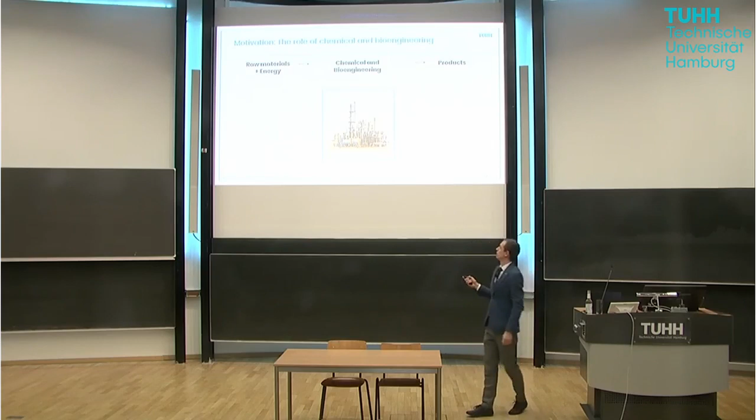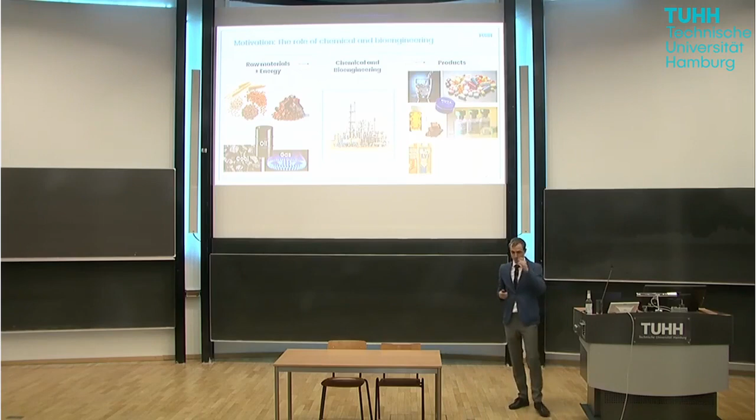Chemical and bioprocess engineering, or bioengineering, does basically one thing, or many things, but you can boil it down to converting raw materials and energy into useful products of our life. Raw materials are agricultural crops, ores, energy carriers, and the products are liquids, beverages, drinks, or pharmaceuticals. The COVID vaccine is a great example of bioengineering that saved a lot of lives on Earth. And also other products like garments, fuels, paints.

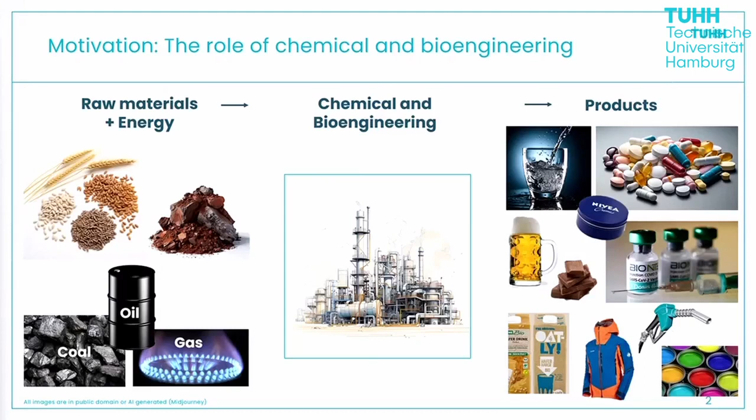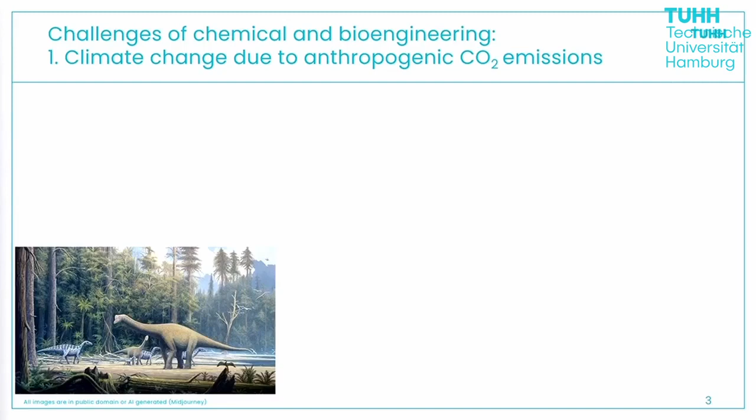Our modern life really relies on chemical and bioprocess engineering. But we do face a couple of challenges, and I want to specifically mention two of those. We heavily rely in chemical engineering on fossil raw materials and energy carriers to produce the things that we do. And what are these fossil carriers? Well, that's nothing else, with a grain of salt, than dinosaurs and what they ate many million years ago. And we're digging that out and we're burning it. What we do is release the hydrocarbons, the carbon in these hydrocarbon bonds, into our atmosphere, and I think I don't have to explain what that does to our climate.

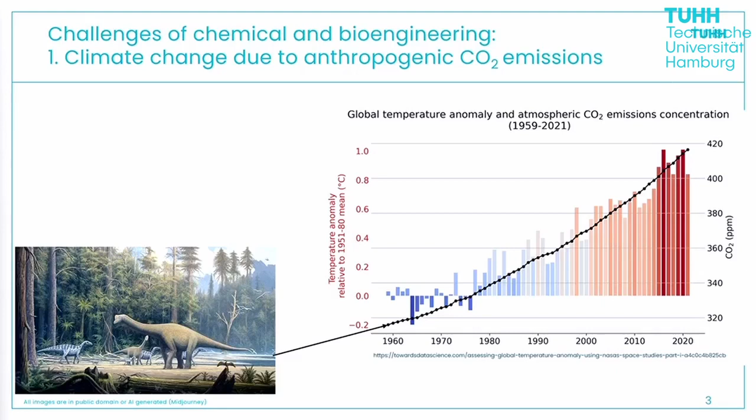This was predicted 100 years ago by Arrhenius, a chemical engineer, and it turned out to be very true. There is a strong correlation between atmospheric CO2 and global temperatures, and they tend to rise, and this is a huge problem that we will all face during our lifetime. So we need to get ourselves independent from these fossil material and energy carriers.

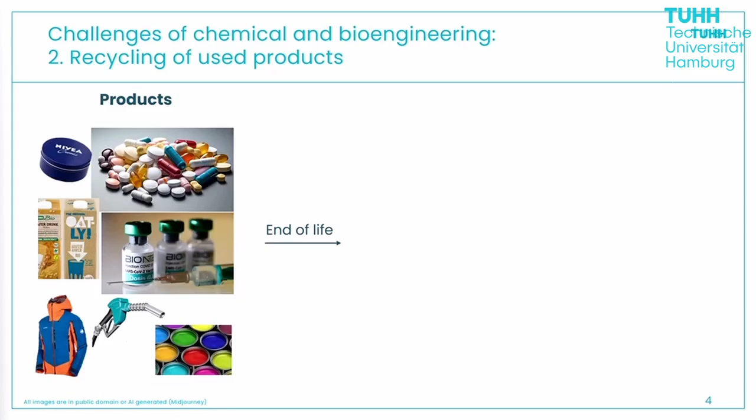A second problem is the products, on the other side. At the end of their life, what happens with these? In Western Europe and in many parts of the world, we do have a strong history of waste incineration, so we just burn our waste, and that releases CO2 again. But there's a lot of valuable materials in this that we could reuse. Even worse, in other parts of the world, landfills are very common, and plastic products pollute our oceans. Microplastics have been shown to be in human bodies. So these are two major challenges that chemical and bioprocess engineering face at the moment.

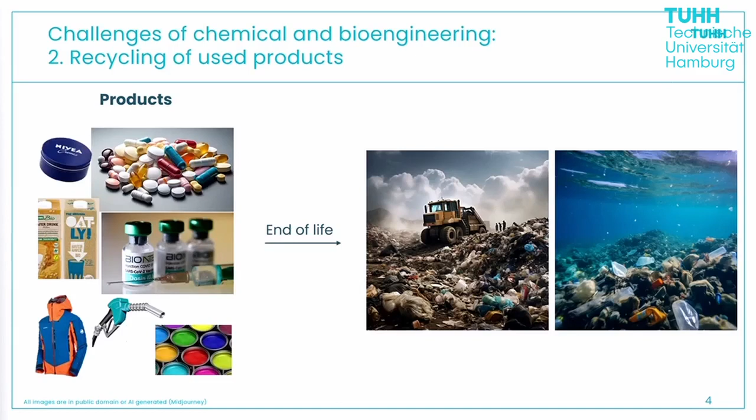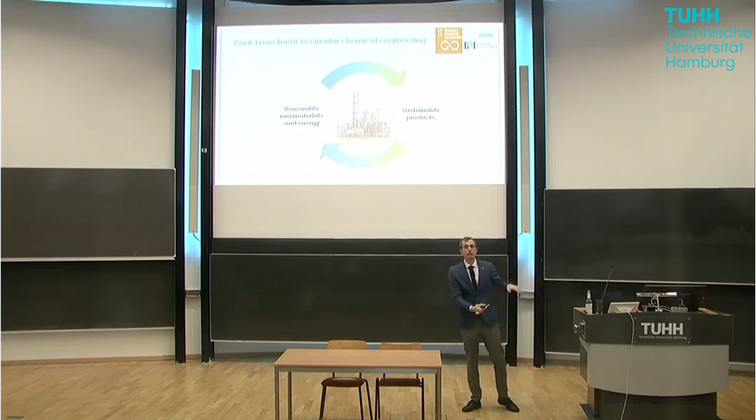One goal would be to close this loop, going from linear production, taking something and transforming it into something useful, to closing the loop and going from renewable raw materials and energy into sustainable products that can later be reused as material streams, as inputs for processes. For example, biomass or CO2 that we capture from the atmosphere as carbon in our materials. We need it a lot in our products, so we need to get it from somewhere, and we can get it from the atmosphere. Energy, there's a lot of energy coming from the sun and secondarily from the wind, we just need to harvest it. This is, partly, political decisions, but also technical, and we're working here on the technical solutions.

Also, have sustainable products, replace fuels as much as possible. Probably in aviation this won't be possible unless we have synthetic fuels, but also plastics that dissolve after a certain time, so it's not that severe if they end up in the environment.

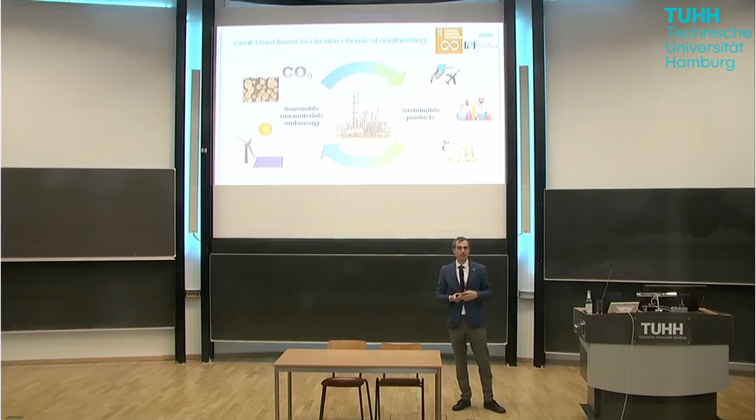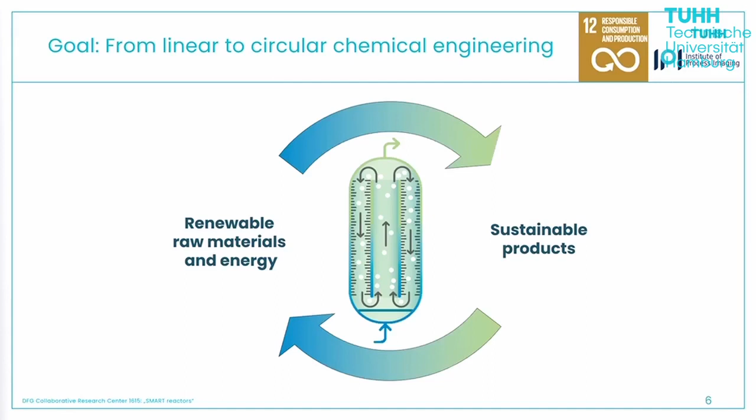What's at the core of this development? In such a chemical plant, the core and the heart of these plants are reactors. We heard the term smart reactors a lot, and this is indeed a picture taken out of the grant proposal that we were granted. The core of it is optimizing these reactors, making them fit to adapt to varying qualities of raw materials, ready to produce different materials, and do that fast.

What we need for that is a detailed understanding and knowledge about the processes happening inside these reactors. What can possibly happen in there? We have different raw materials, they mix, and we need to get them in contact. Where are which materials, where are the phases, for example liquid phase, solid phase, gas phase? Measuring where they are in space and time is important.

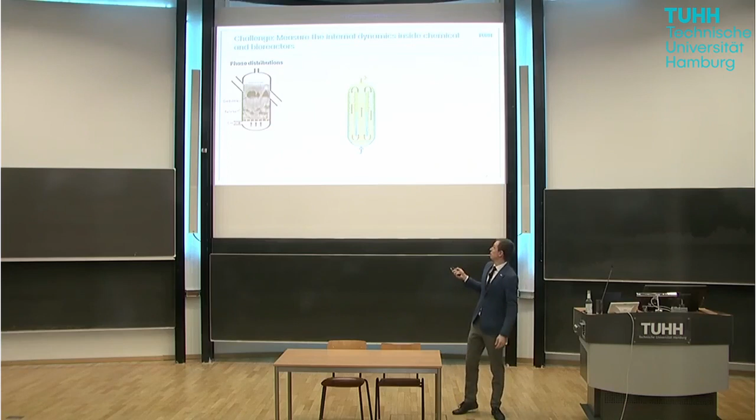Measuring the flow of materials is really important when it comes to mixing and residence times. Temperatures are also super important because chemical reactions, which we look at mainly, depend a lot on temperature. If something's hot, it might react faster, and if it's colder, it's slower.

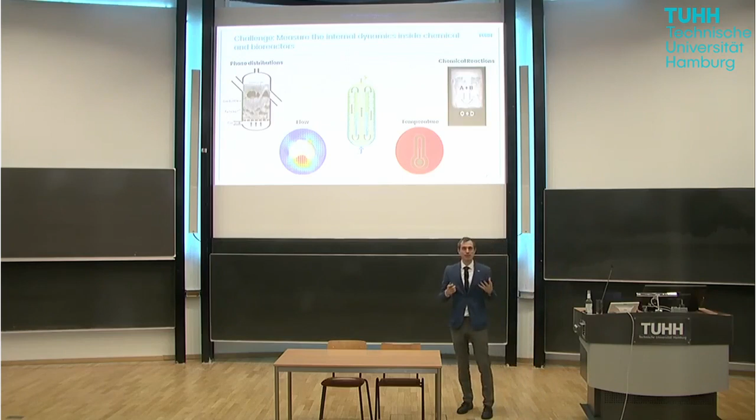And ultimately, this is kind of the holy grail in process imaging: we want to see where chemical reactions really happen, differentiate between chemical species, and really map in space and time where such a chemical reaction occurs.

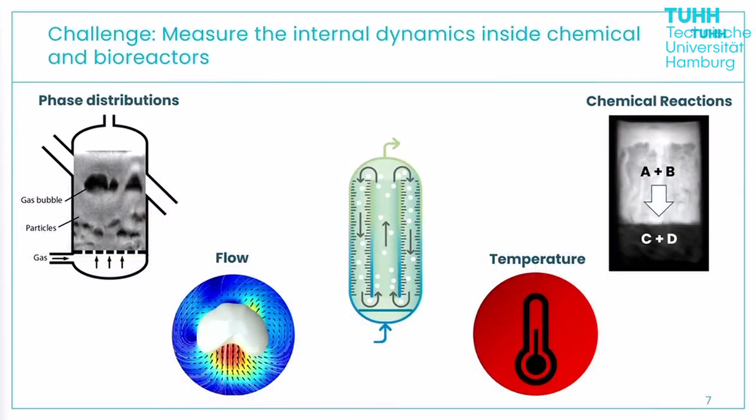For example, why this is important in a bubbling fluidized bed, a reactor type used for coating materials, absorption of CO2, and combustion of fuels. Here gases bubble through a granular material, so grains, and it looks like a boiling liquid as gas bubbles erupt and behave in quite interesting ways.

The gas bubbles are very important to promote heat and mass transfer and mixing. Efficient reactor design and control really relies on understanding these gas bubble dynamics, so we need 3D imaging with high spatial and temporal resolution.

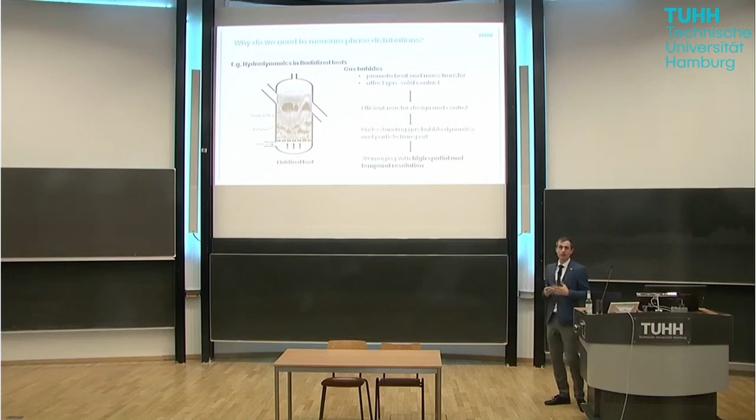A second example I want to give is temperature. Why do we need temperature? For example, in heterogeneous catalysis, like our colleague Raimund is investigating, we have a gas phase that passes through a packing of catalyst particles, and these catalyze a gas phase reaction.

When these are in contact, and this reaction is exothermic, we might end up having hot spots where we locally exceed temperatures that are unhealthy for the catalyst, so it gets degraded or deteriorated. Or we can have cold spots, regions where we don't have enough flow, and then the reaction dies off, creating ineffective zones that decrease the efficiency of the overall process.

So thermal monitoring is very important in optimizing such reactors, both in space and in time. Not just sticking a probe into a reactor and saying the temperature at this one location is X, but really seeing the temperature map, the three-dimensional distribution. That's a different quality of information.

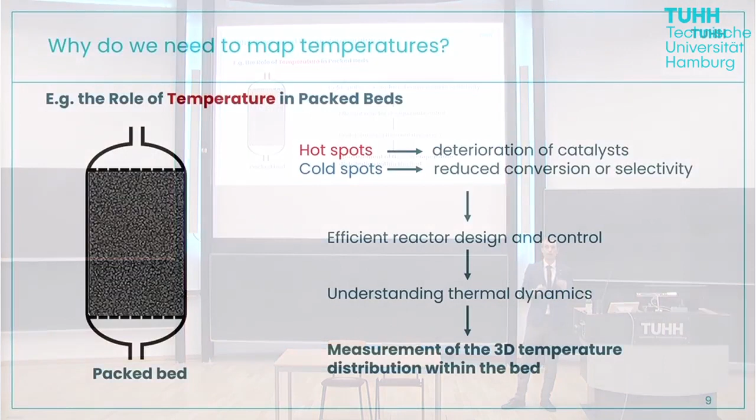And also, if you compare it to numerical modeling, which plays an important role in the future of chemical engineering, then these reliable and highly spatially and temporally resolved information are essential. So where do we get this information from?

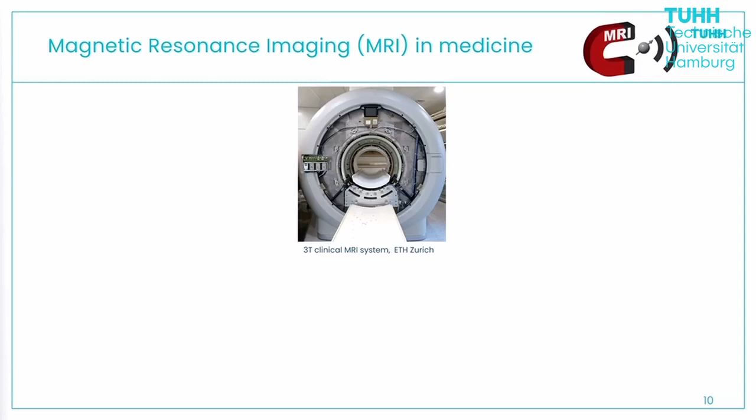Well, there's a technique you might be familiar with from your own medical experience. When you had a broken ligament in your knee or ankle, you might have been inside an MRI scanner. It's very loud, but it gives fantastic information about the interior of your body without cutting you open. This is valuable because cutting open my skull, I would not have agreed to. But in this case, it was just half an hour in a loud environment, and then you can beautifully see how such a brain is made up.

This is work by a former colleague in Zurich, where you can measure the instantaneous flow of blood inside a living human subject, in this case an aortic bow. You can really see if something's dilated, or if you have turbulence that makes the performance of a heart weaker. So for diagnostic reasons, this will become useful in the future.

This is also a technique called temperature sensing with MRI, where a dog with a tumor was treated thermally, with a laser. The tumor was ablated, and with MRI thermometry, it was controlled to ensure the temperature doesn't rise too much, because you don't want healthy tissue to die off. You really want to concentrate it on the tumor spot, and this technique was used for that.

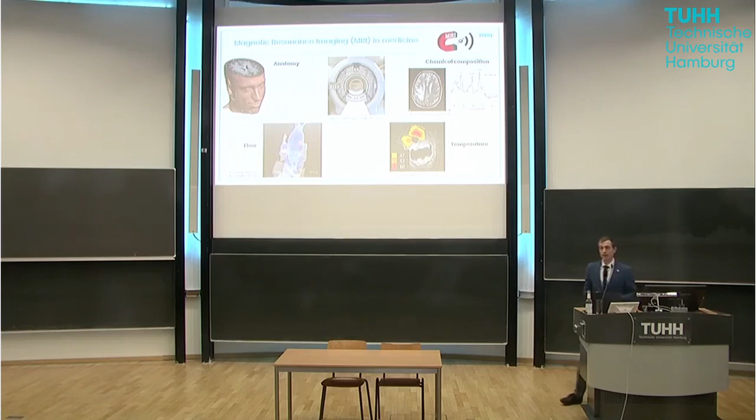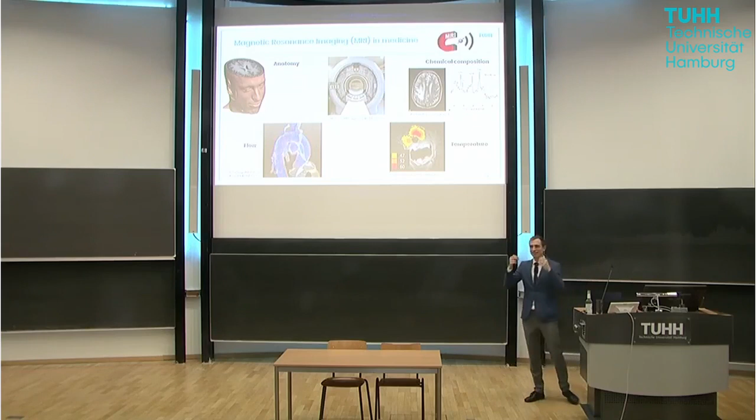So we see that a lot of what we wanted from our reactors is already there. And it's no wonder, the body is nothing else than a very complex biochemical reactor. We eat and we drink, we also extract waste products, but we do have... we think, and all of these things, they're massively complex, but in the end it's very similar to a biochemical fermenter, for example for the production of the COVID-19 vaccine.

So the big challenge now is, how do we take the clinical MRI technology, which is really advanced, as we have seen, so really big amounts of money have gone into this development during the past decades because it's such a useful tool, and how we can translate them into process engineering and make them useful for what we want, really understanding reactors.

Clinical MRI technology is really optimized for the human body. And that means the hardware is optimized for patients that lie horizontally when they're being scanned, so they don't move. That's important, that they don't move. And the materials, so the materials of human tissue, these scanners are optimized to, and the pulse sequences as well.

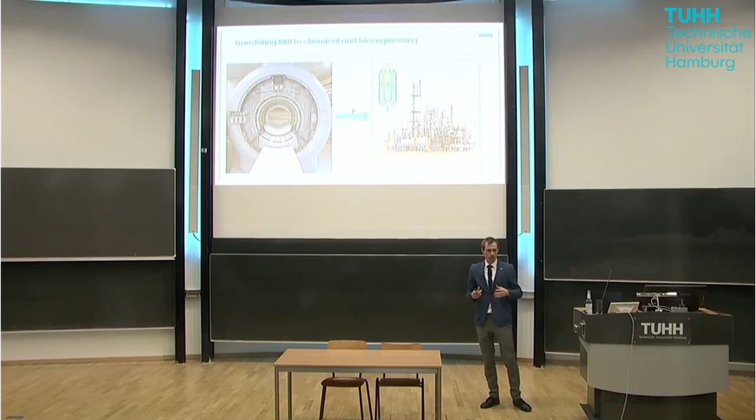And so when I started my PhD in 2013 with Klaus Prüßmann and Christoph Müller, we set out to really modify all of what the MRI experiment is, and try to optimize it for this type of systems that chemical engineering has. And that entails dedicated MRI hardware.

So really going close to the geometry of reactors, in this case a vertical geometry where you really have a proximity of your coils, because the signal decays quadratically with distance. So you want to be close, and you want to have multiple channels to be fast in scanning. So materials, manufacturing.

Oftentimes it's even easier in chemical engineering than it is in the human body, because in chemical engineering, in a reactor with gas and liquid, you don't care if you add a little bit of poisonous contrast agents, whereas in the human body you're quite limited on how much contrast agent you can inject. So this is even a part that gives us more freedom.

But yeah, in this case, for granular materials, for these fluidized beds that I showed you, and I will show you in a second some more, it was important to synthesize particles that have strong MRI signals, so liquids encapsulated in polymer shells.

Pulse sequences, so this is also a major thing where you have a lot of potential to increase spatial and temporal resolution, is by sampling your data space in an efficient way. And for that, you need to do your homework here and have enough signal, because during the time you read out your signal, it decays.

If it doesn't deliver enough signal, or your coils are not there, then you won't be able to do these single shot excitation, time-efficient readouts. And yeah, of course you need to reconstruct this data into images, and to automate and process these and do image analysis and interpret this data.

So as I told you, this reactor, for example, was modeled and then built. Previously, people used agricultural seeds like poppy and mustard seeds, but we came up with different materials that give quite a bit more signal, and we're further developing them and making them consist of contrast agents.

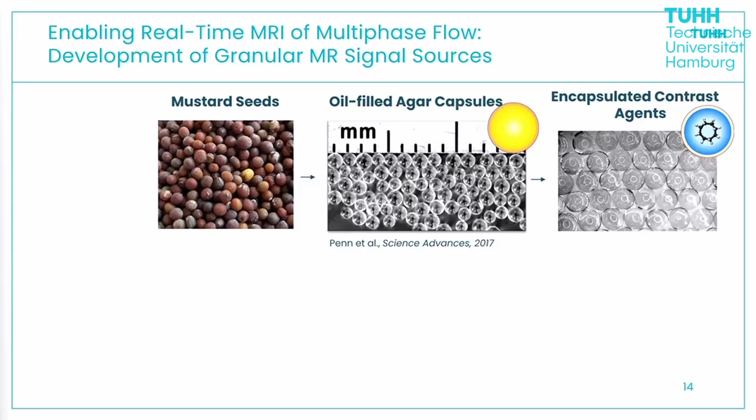As I said, these are a little bit not so... it's rare earth dopants that increase the magnetic susceptibility, which improve homogeneity of the field and then give you even more performance.

And yeah, if you compare them mechanically, this is much better. They're more spherical, so you compare them better to, for example, CFD simulations. They have higher proton density, so there's more oil in those than there is in those.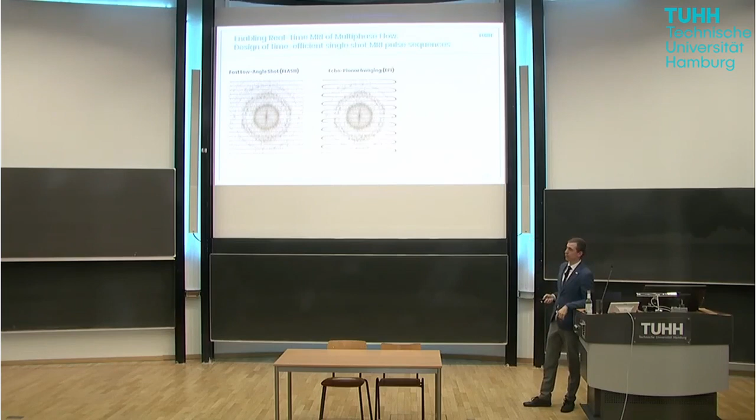And the signal lifetime, most importantly, as I told you, the signal lifetime really determines what type of sequences you can run, and this is important. For example, fast low-angle shot or gradient echo sequences, where you excite each line, they need more time. And if you can run through K-space, that's the data space in MRI, at once, then you're faster. Or spirals are even better.

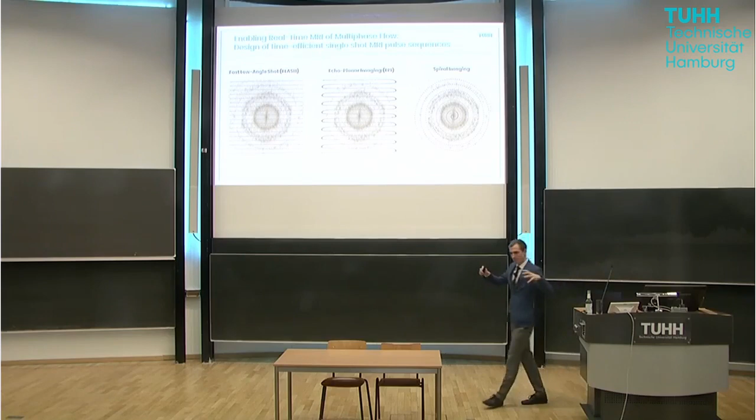For that, you need even more precise field control. So, in essence, we looked at the toolbox of the MRI chain and tried to modify and optimize each bit and stitch it together. And then, indeed, we were able to get down to 7 milliseconds per slice images.

And I will show you afterwards also a video of, for example, this bubbling fluidized bed. And that gave us unprecedented information of what's happening in such a reactor. And so such an experiment looks like this. We have this reactor model.

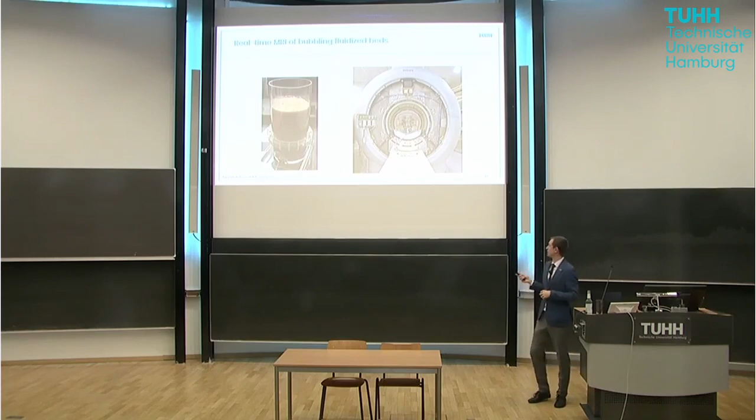This was still done on a horizontal scanner back in Zurich, with our coil. So it bubbles, like a boiling liquid, and you can see it indeed is, but you have no chance of seeing what's happening inside. With MRI, you can see that.

What's happening inside is quite chaotic. If you analyze this data set, you can deduct many useful things: how do bubbles interact with each other, how do they coalesce, how do they split, what's their speed, what's their spatial distribution in time. They tend to grow - this is something known, but how they really distribute and interact is difficult to obtain with any other technique.

But MRI, so far we were at the spatial distribution of phases - it can do that quite well. But MRI is super flexible as well.

It can give you information about, for example, flow, and people have done this. This is work by Daniel Holland from Cambridge University, quantifying flow with MRI. It took about 20 minutes average of such a fluidized bed to detect the flow pattern. By combining our fast imaging techniques with phase-sensitive phase encoding, we were able to get this down to 21 milliseconds per shot - about 10,000 times faster, which really opens up a different window for analyzing such systems.

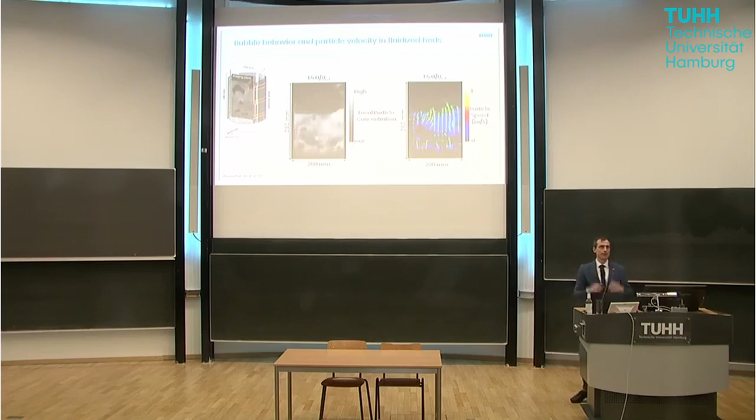We use this technique to quantify bubbling hydrodynamics in bubbling fluidized beds with different particle types, different fill heights, different fluidization velocities, really trying to widen our parameter space to get a lot of information out of the systems.

We added small amounts of liquids - fluidized beds are often used for drying purposes as well. If something's wet, you know that from building sandcastles on the beach: wet sand behaves completely different from dry sand, so you cannot build a sandcastle out of dry sand. On the other hand, you cannot fluidize wet sand, but somewhere in between, if you add small amounts of liquids, it starts getting into this nasty regime.

Knowing more about this is possible with MRI in this case.

Then also fluidized beds with internals - for example, when you want to introduce or extract heat, you have heat exchanger pipes or baffles that change the flow structure, for example to reduce the maximum bubble size. You can image these baffles.

This was work already done by Hannah Rennebaum, who's sitting here. We measured in Zurich, so thanks for giving us the opportunity to come back to Zurich and use the scanner while we were here building our kitchen, so to say. That was very valuable, so we could use the time here to continue being productive.

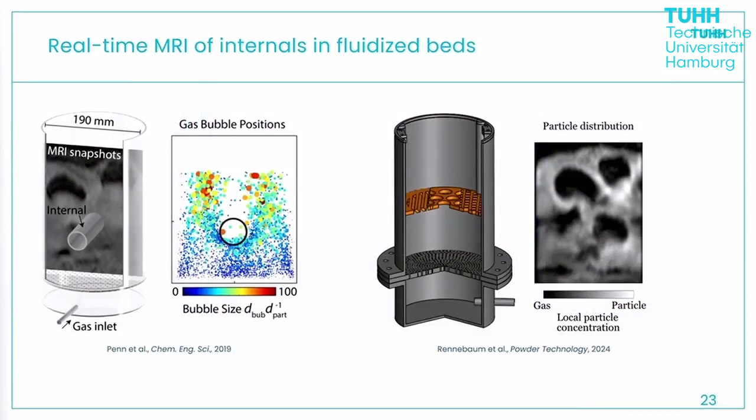Now I had phase distributions and flow, and now we're going into thermometry, so temperature. There are various things you can do to measure temperature with MRI. One way is to look at the proton resonance frequency shift that depends on temperature in some materials. For example, in water, you shift this peak position in the NMR spectrum, and this shift here in parts per billion - note this is quite a small shift, but it's a spectroscopic technique.

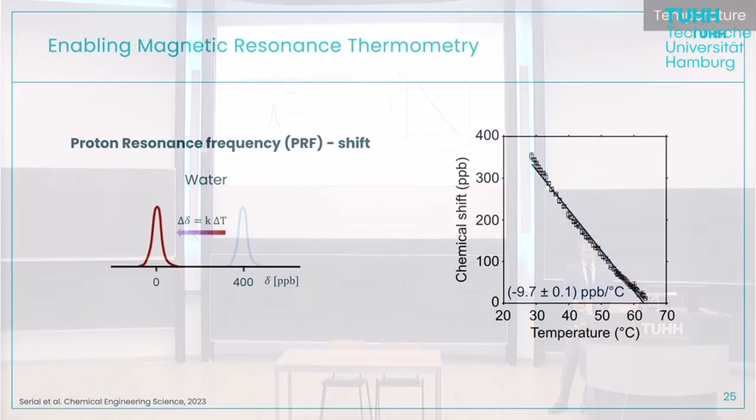You can really, really accurately determine this shift. It varies more or less linearly - it's not perfectly linear, you could probably do better, but in our first approach we assumed it's just a linear slope. This was work done by my postdoc Raquel Serial, sitting here, also in collaboration with ETH Zurich.

So we had a packing of spheres that we injected hot air into. This was initially at room temperature. The spheres were filled with water - you can see them here. Everything was scanned inside a clinical MRI system.

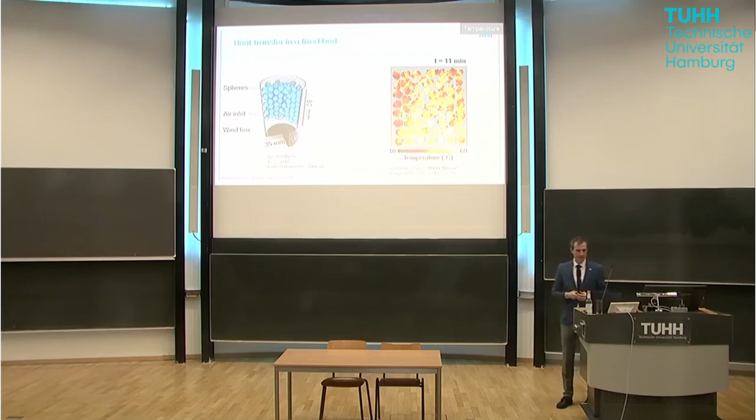We were able to track or measure the heating up of this packing as a function of space and time. This was a full 3D sampled measurement - we did multiple slices. I'm just showing the central slice here, but it's a 3D measurement. We also did some numerical simulations that back up our experiments.

So it's something that was a first proof of concept of proton resonance frequency shift in fixed beds, and it's something that might become quite useful in the future. And for our projects, we are already very keen.

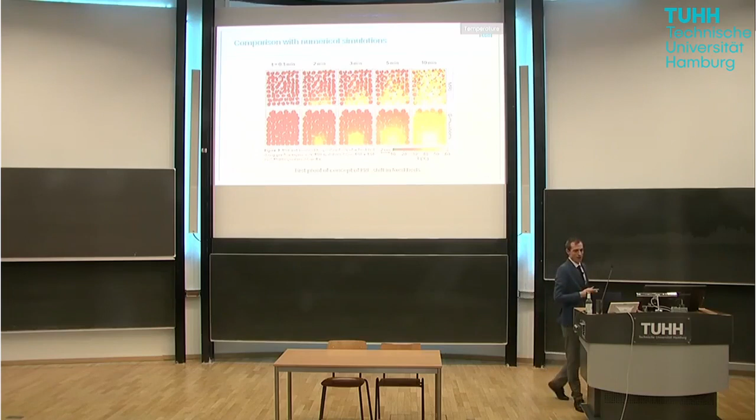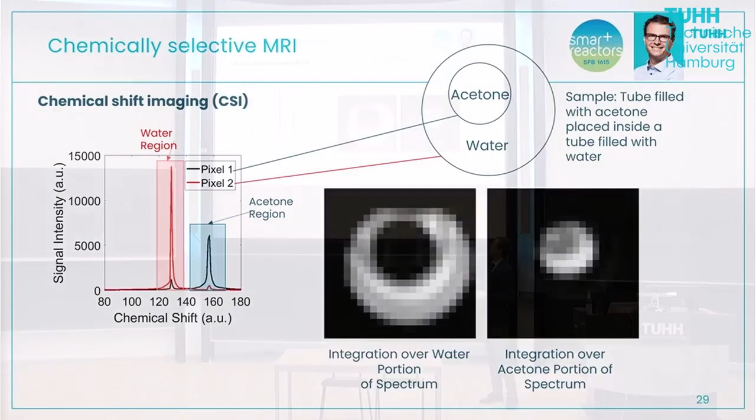And the last but not least ingredient that I promised is chemical contrast. So we want to discriminate between different raw materials, between different products in our reactor. And MRI offers quite a few options to do this, for example chemically selective imaging, where you look at different portions.

For example, here we have a phantom. This is also a collaboration ongoing within the smart reactors with Tobias Knopp. We're working on chemically selective MRI. So if you look at a sample that's made out of water and acetone in two different separated containers so they cannot mix, then take an image and look at the spectrum in each pixel, it is different because water and acetone have a different chemical shift.

And so if you only integrate over the water region and reconstruct an image, then that's what you end up with. And if you only integrate over the acetone portion of the spectrum, you end up with this inner circle. So this is one way of getting chemically selective contrast.

Another way is to look at different relaxation times, for example T2. For example, in this autocatalytic reaction where a cobalt-2 species reacts into a cobalt-3 species, and the catalyst is produced during the reaction, there's like a wave front that propagates through such a reactor, and the raw material and the product have different relaxation times. And if you make your contrast sensitive to this relaxation time, you can track this reaction over time.

And we're very much looking forward to establishing this technique within the CRC.

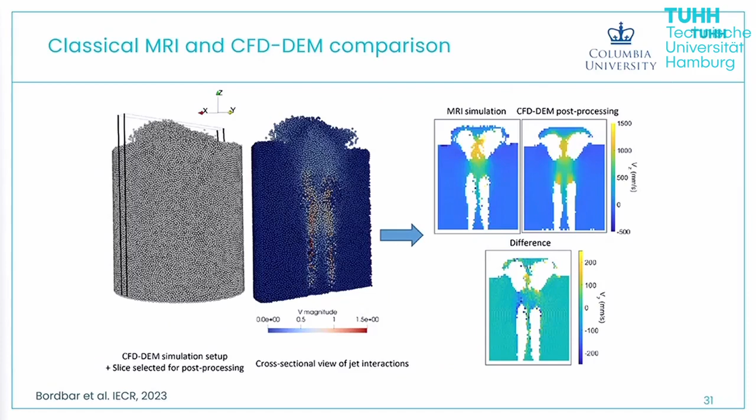I would briefly also mention work that we did during the past 3 years while we did not have a scanner running. We did CFD-DEM simulations and compared them with our MRI results. Normally people just compare instantaneous CFD simulations, numerical simulations, and MRI experiments, but they neglect some effects of the MRI. So we used the CFD as an input for MRI simulations, simulated the experiment, looked at what came out of it, and looked at different ways of interpreting and comparing the two.

And we got really interesting results, and that was just published. It was together with Chris Boyce at Columbia University and led by Stefan Benders, my senior engineer, who's sitting right over there.

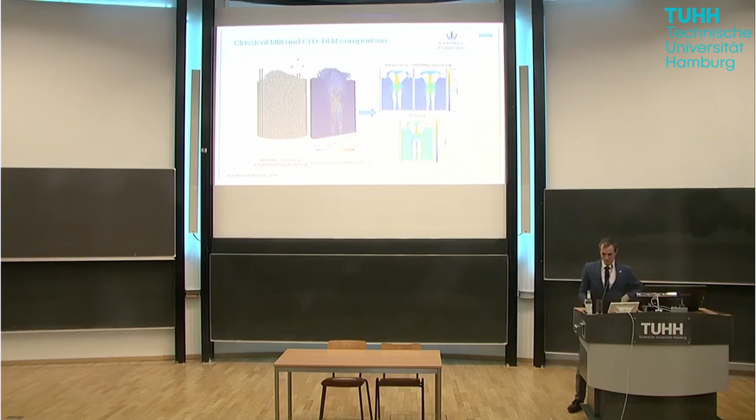To conclude this section, I hope I could show you that MRI is indeed a very, very suitable tool for chemical engineering, and it can deliver the spatial distribution of phases in different material systems. It can measure the flow. It can even map temperatures and chemical reactions. We do have some opportunities.

This is more experimental yet, but it will become useful in the future. And it was already mentioned, we do have an MRI here that we will look at in a couple of minutes, and I'm really looking forward to showing you this system.

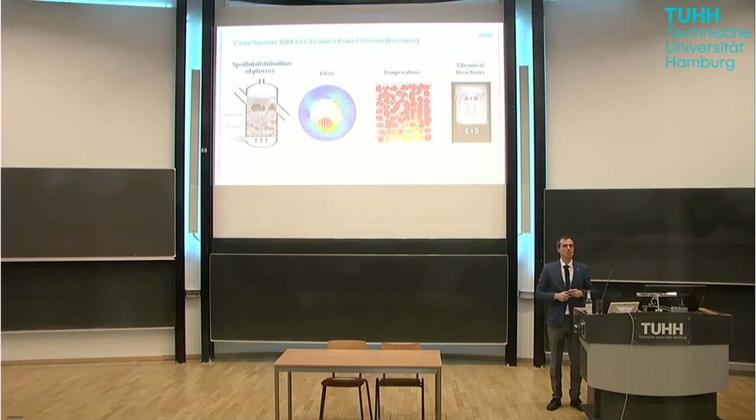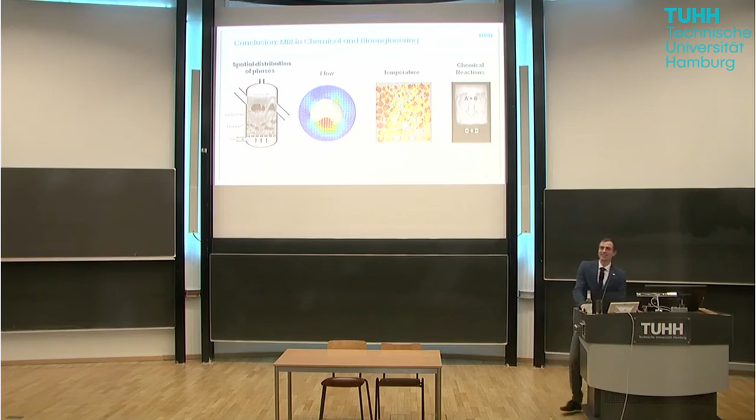Why did we go for something prototype-ish? Why wouldn't you just buy a machine? Well, the idea was, what's on the market is either micro-imaging systems - you might know the NMR spectrometers from Bruker or Varian in previous days, which have fantastic spectral resolution because they're made for chemists who want to discriminate between molecules, but are very limited in the sample size they can take. And on the other hand, we have clinical systems. We can lie in them, we fit in those, but the height is quite limited.

And process engineering lives from gravitational instabilities, so from gas wanting to go up and heavy things wanting to go down to have mixing. So most of the reactors are vertical and upright. And so I thought, and this was a discussion with people, if we could have the ideal system for process MRI, how would it look like? Well, we just take a clinical system and put it upright and tilt it on its side.

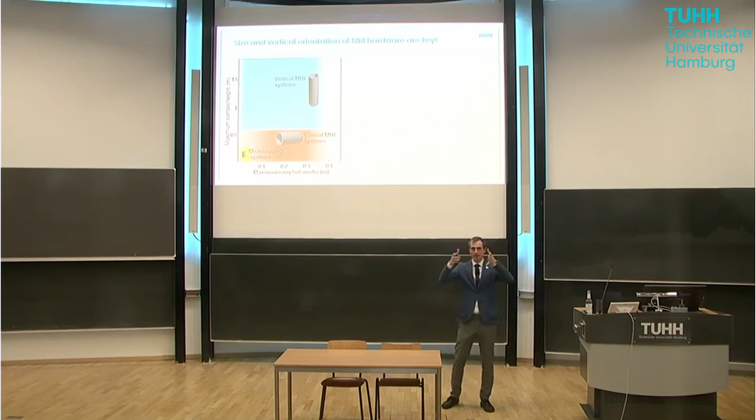When I talked to them and said, hey, let's just take one of your systems and flip it up, right? They were not so happy with that idea because it floats in liquid helium and it's mechanically super sensitive, and if you turn this around, it will just crash and collapse. So we would have to re-engineer the whole thing, and that's millions and millions. We couldn't afford that.

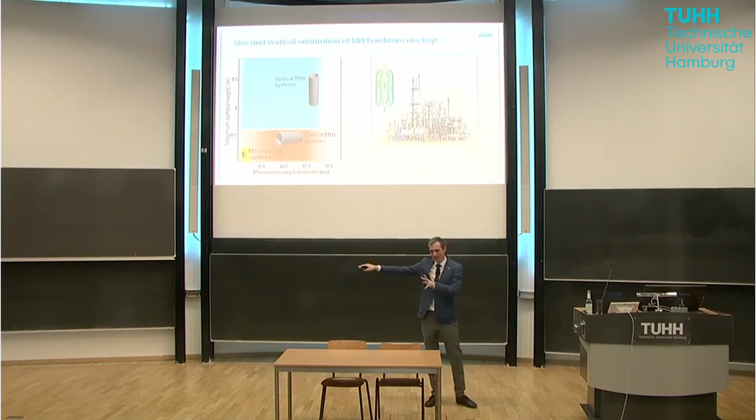So as I told you, these reactors are upright. We were looking for partners to build us such a magnet, and you don't only need the magnet, because an MRI consists of a big magnet that creates a strong magnetic field, but also gradient coils that create spatially varying fields, and RF coils. That's why Philips is here. You also need all the back end that powers the system - the amplifiers, the spectrometers, the cooling, all the infrastructure, the computers.

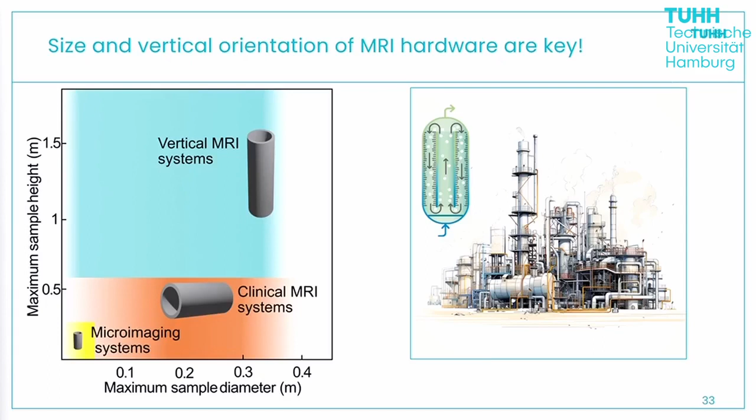So we found a consortium of two companies. One is Tesla UK, and Tesla Dynamic Coils, a daughter company of them. They said, yes, we will do it, we will build the magnet for you. It's a little bit smaller than a clinical system, but almost the size of a clinical system. And Philips agreed to deliver the backend.

We were very happy because also in Zurich, I was working with Philips backends, and I know them, and they work well. Three years later, we now have this system here finally commissioned and working. We did some scans. I will show you one image that we took yesterday night - Stefan took it yesterday, and I'm excited.

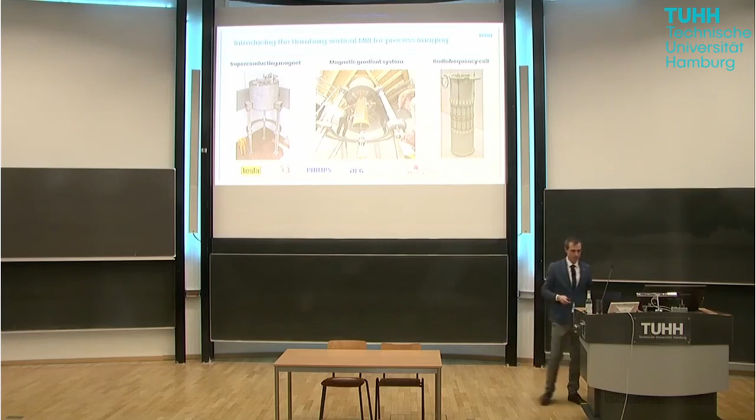A few specifications I want to mention: this funding was kindly applied for by my colleagues, mainly Michael Schlüter and Raimund Horn, and many other colleagues from the School of Process Engineering who also delivered their applications. I can imagine it was not so easy, not being MRI experts, to anticipate what you can do with this device. But it was convincing, and we got the money, and TUHH agreed to chip in the second part of the money.

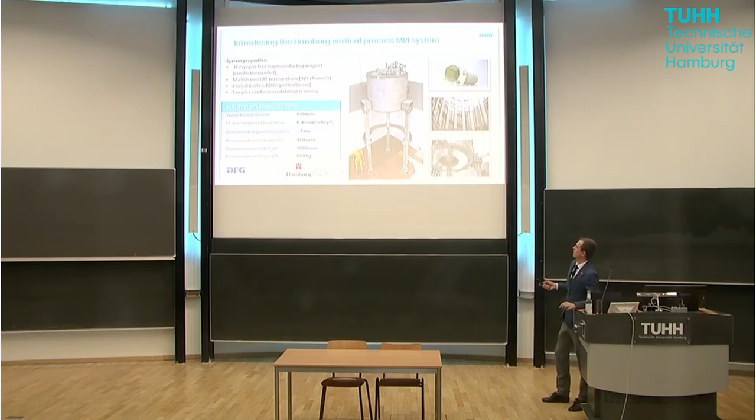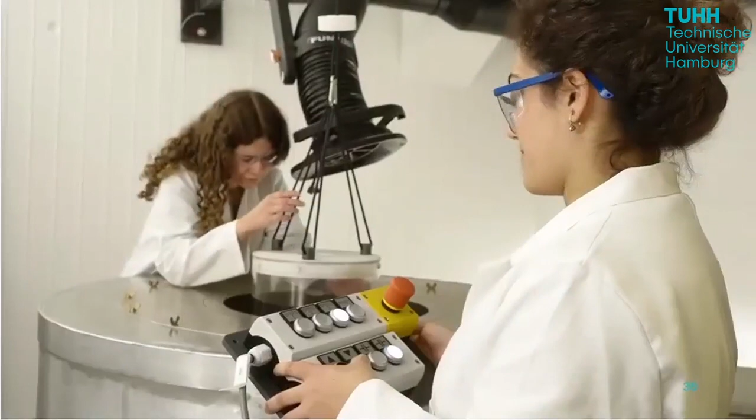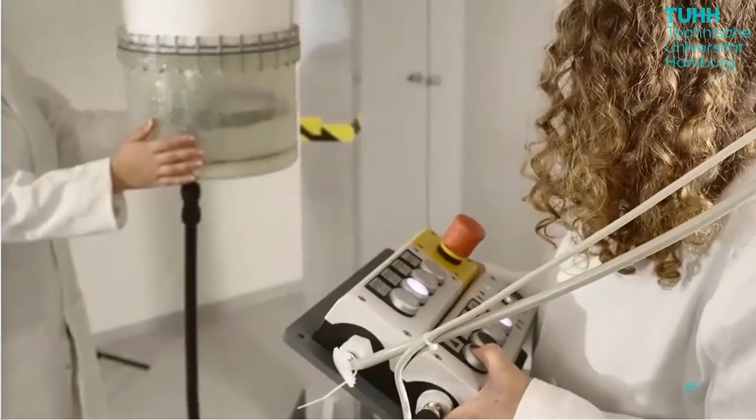This is a short video that shows the system in action by our two PhD students. That is a movie made for the smart reactors. So here we see a fluidized bed that's being inserted into this MRI, and it's being scanned.

There are still some phantoms, but the idea is that we now have the opportunity to not only look at systems of this size, but several meters tall and even larger, and that's just a different game, a different thing.

And what do we want to do with this? We have 1,000 ideas, and I'm very grateful to my colleagues for all their ideas, because they want to use this machine and they have high expectations. I just want to mention a few - I cannot mention them all.

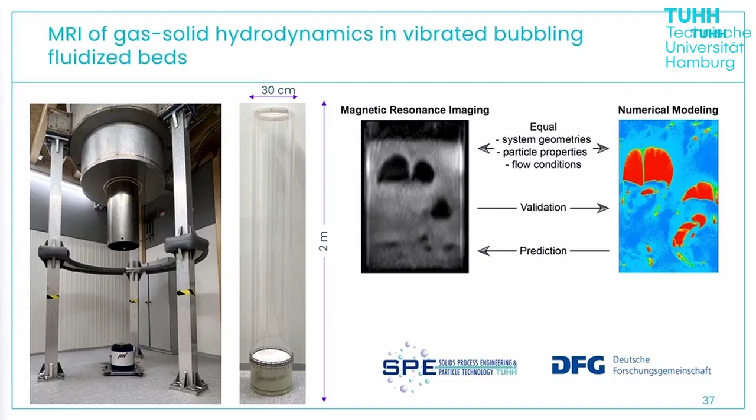This is a project that we have together with my dear friend and colleague Stefan Heinrich, sitting here in the second row, from the Institute of Solids Process Engineering, where we look at vibrated fluidized beds. You see this electrodynamic shaker, 150 kilograms of magnetic material right under the magnet, but we were outside of the 5 Gauss line, so don't worry. We're also outside of the RF cage, which gives us a lot of flexibility to have reactors here. The idea is to compare numerical simulations and experiments and predict how vibrations affect fluidization hydrodynamics, and in the course of this project, we're also using high-speed camera technology.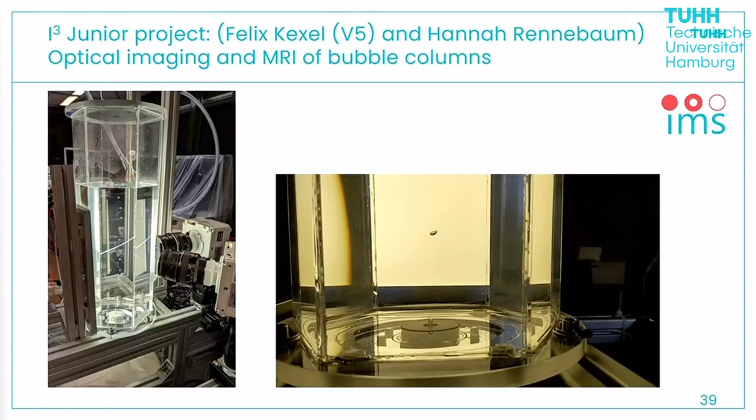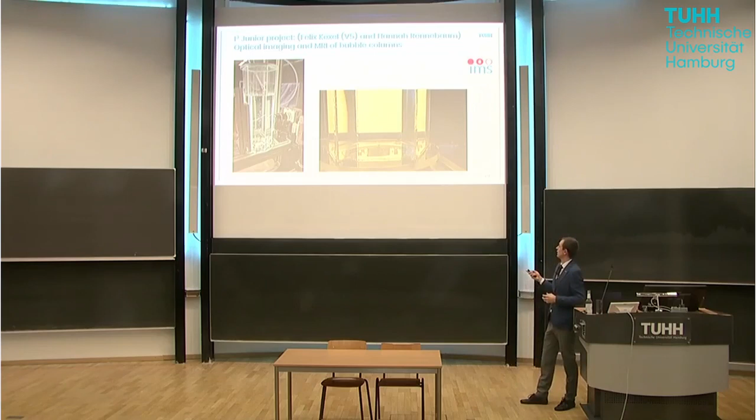A second project is funded by the iCubed Junior project. I'm very happy that this is a collaboration between our institute and the Institute of Multiphase Flow, led by Michael Schlüter. Hannah Rennebaum and Felix Kexel got money from this iCubed project to look at a system with optical high-speed imaging from different angles, so you can really reconstruct a 3D image of a gas bubble rising in a liquid column.

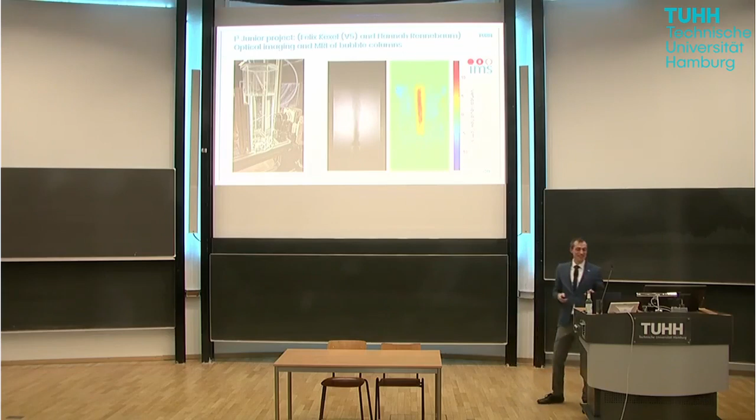Our part of it is to deliver the MRI experiments, and these are the first MRI experiments of this system. I've never shown any images taken by the system before, so you're the very first ones, and they were taken yesterday night, so they will get much better. We still have attenuators on them because the company of the coil needs to come back next week to tune something, but at least it makes images for now, and I just wanted to take the opportunity to show it to you as well.

Another collaborative project is together with Mirko Skiborowski. Here we look at the wetting of structured packing. We just submitted this proposal to the German Research Foundation, and we hope to get funded. We want to see how different packings behave under different conditions, and look at the wetting, the surface area, and the flow of the liquid inside these reactors.

Another project is in collaboration with Irina Smirnova and the Institute of Thermal Process Engineering, also related to the smart reactors. We're already getting started, using different hardware - a low field system currently located at Andreas Liese's lab, so also a collaboration with his lab. We will get such a device, a low-field NMR system, in our lab soon, thanks to the TUHH CRC smart reactors, so we're really happy.

That will have even higher gradients, so we will be able to see pore structures, for example, in swelling lyogels. This is a structure inside the reactor that changes its shape and size when something in the input material stream changes, for example the temperature, pH, or the quality of a raw material. For example, it expands, thereby reducing the flow, and that can be used as a smart actuator that regulates a system.

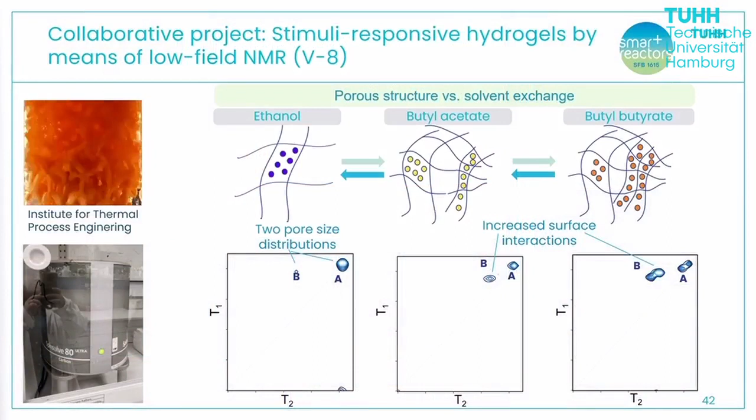All right, so this is all. We are already at the end of the time, and I really would like to take the time to show you the system as well.